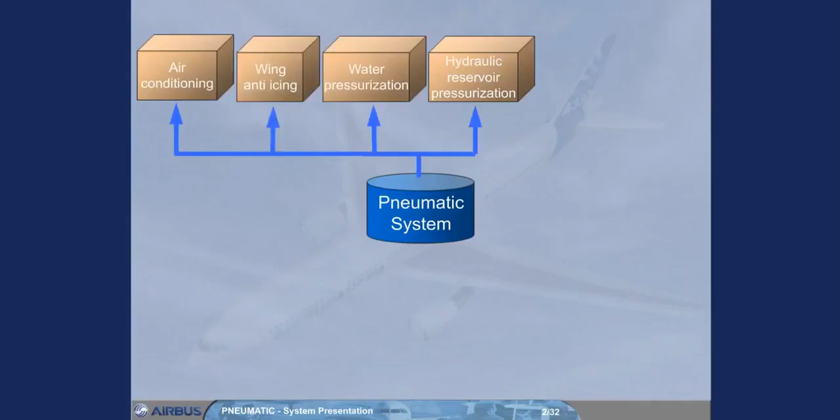The A330 pneumatic system supplies high-pressure air for air conditioning, wing anti-icing, water pressurization, hydraulic reservoir pressurization, engine starting, pack bay ventilation, and turbo fan actuation.

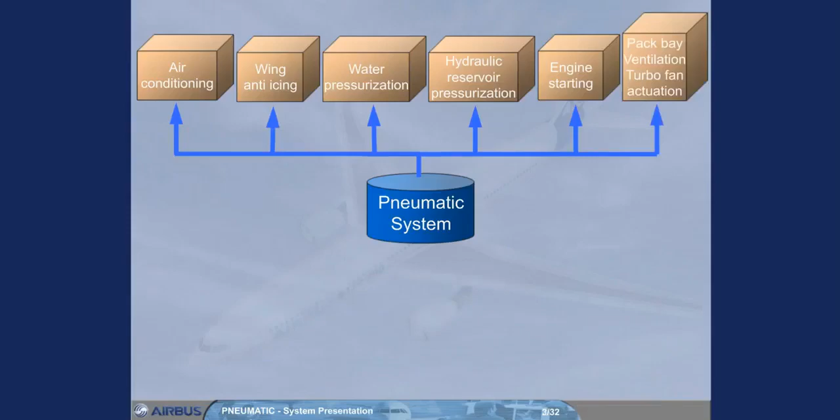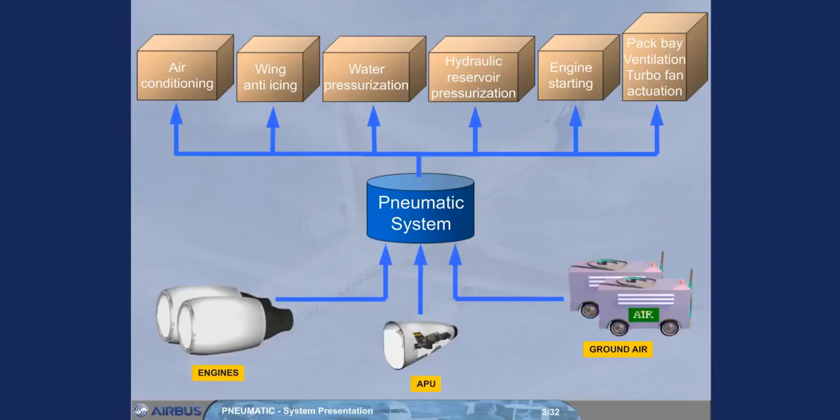High-pressure air can be supplied from three kinds of sources: the engine bleed system, the APU, and two external high-pressure ground power units. Note: wing anti-icing is not permitted when the pneumatic system is supplied by the APU bleed.

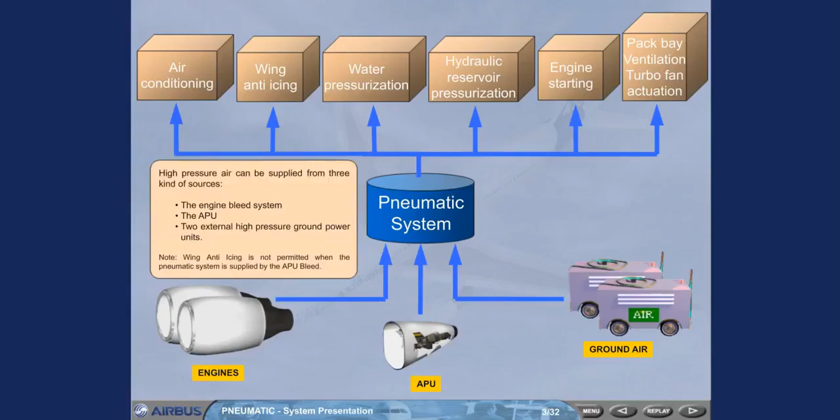The pneumatic system is controlled and monitored by two bleed monitoring computers, BMCs. There is one BMC for each engine bleed system. Both BMCs are interconnected, and if one fails, the other takes over most of its functions.

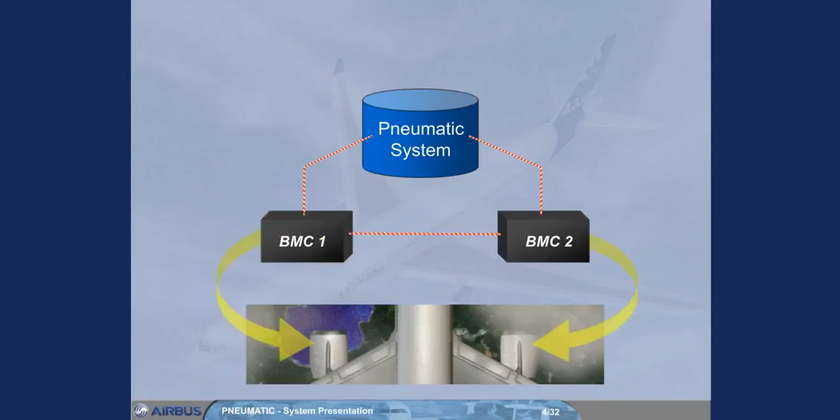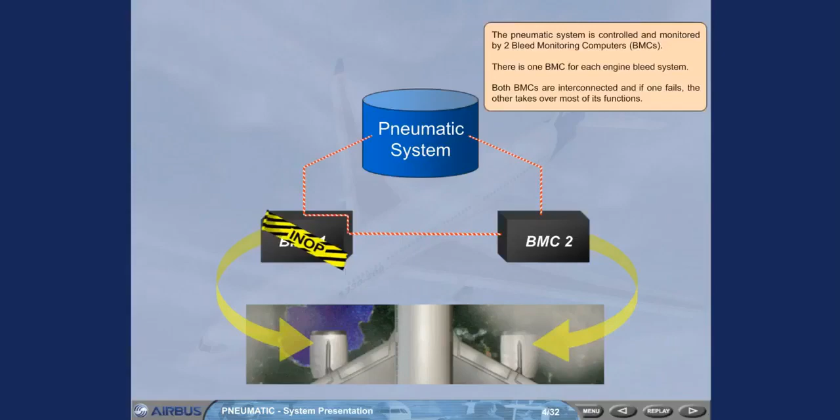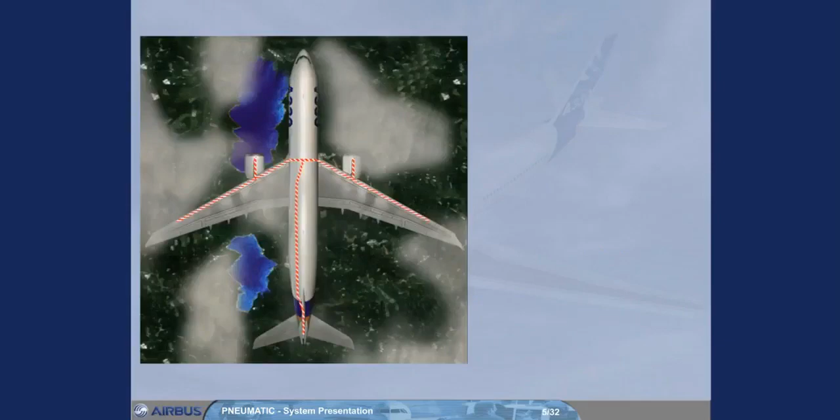An ambient overheat in the vicinity of the hot air ducts in the fuselage, wings, and pylons will be detected by air leakage detection loops. If a leak is detected, a signal is sent to the BMCs, which automatically isolate the affected area.

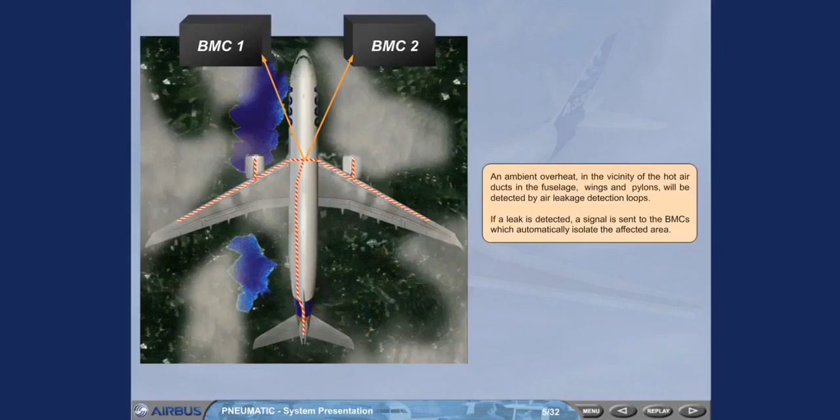In flight, the primary source for high-pressure air is the engines.

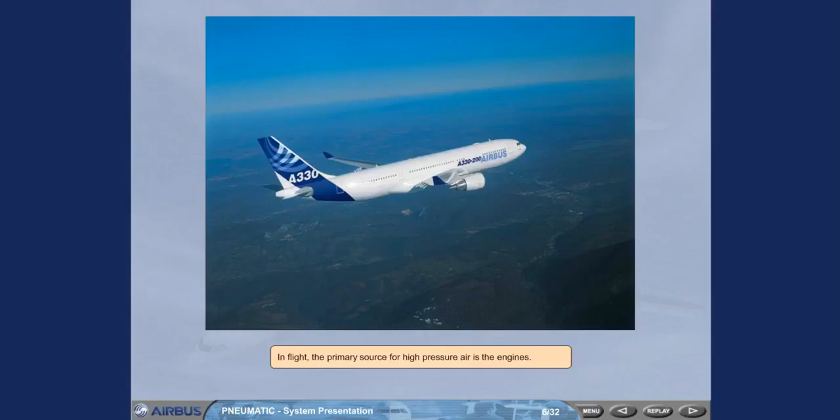Air is bled from two compressor stages of the engine: the intermediate pressure, IP port, and the high pressure, HP port.

There's an HP valve, which can cut off bleed air from the HP port. It is automatically controlled by the system and will limit the downstream pressure. Note: there is a non-return valve at the IP to protect the compressor against a reverse flow from the HP.

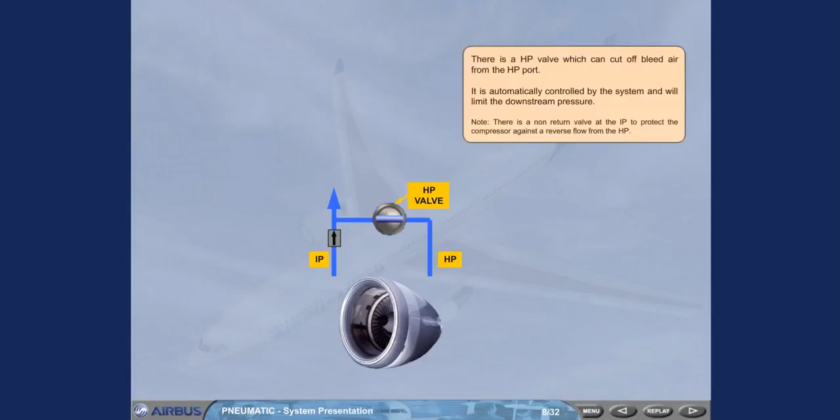The high-pressure section, HP, is only used when there is insufficient pressure from the intermediate pressure output, IP, due to the low engine compressor speed. Once the engine compressor speed is high enough, the IP is sufficient and the HP valve closes.

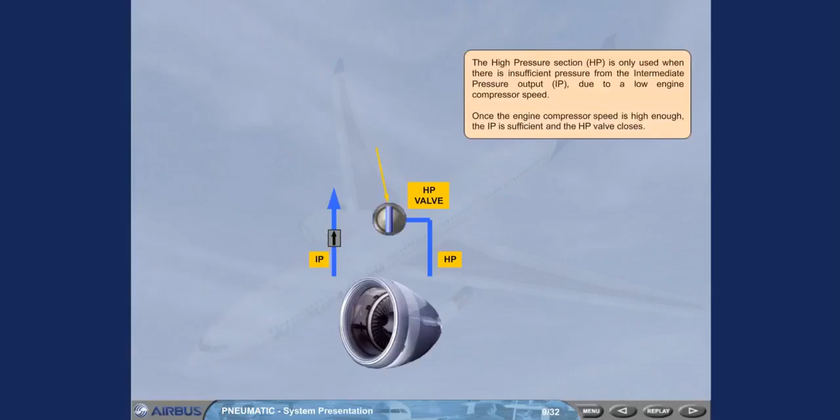The air extracted from the IP or HP stage of the compressor then goes to a bleed valve, which acts as a shutoff and pressure regulating valve.

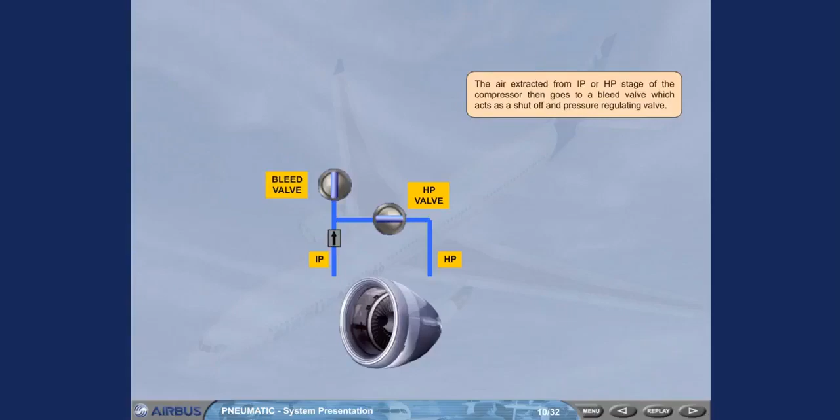Since the temperature of the bleed air is high, it passes through a precooler before being distributed to the users. The precooler heat exchanger uses cooling air, bled from the engine fan, to regulate the temperature according to the demand. Note: an overpressure valve, OPV, will automatically close in case of pressure regulation problem.

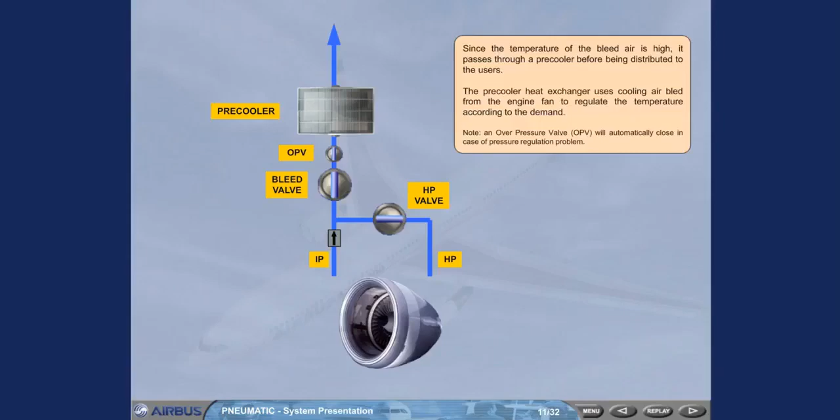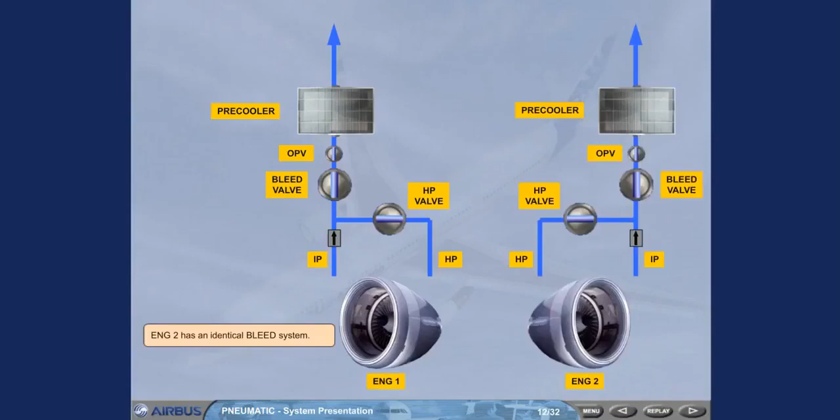Engine 2 has an identical bleed system. Both systems are connected by a crossbleed duct. A crossbleed valve permits their interconnection or isolation.

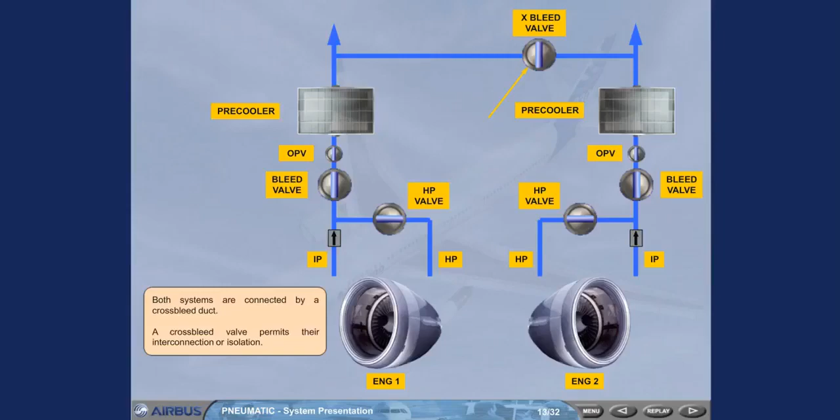The APU can also be used for bleed air supply. This is usually done on ground for air conditioning and for engine start. However, APU bleed air is also available in flight.

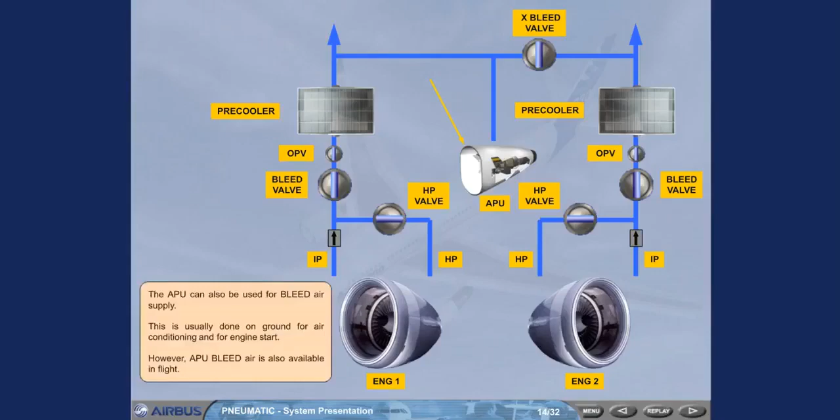APU bleed air is controlled by the APU bleed valve, which operates as a shut-off valve and will be kept open by the electronic control box, ECB, as long as the altitude is lower than 25,000 feet when climbing or 23,000 feet when descending. Note: a non-return valve protects the APU compressor against a reverse flow from another supply source.

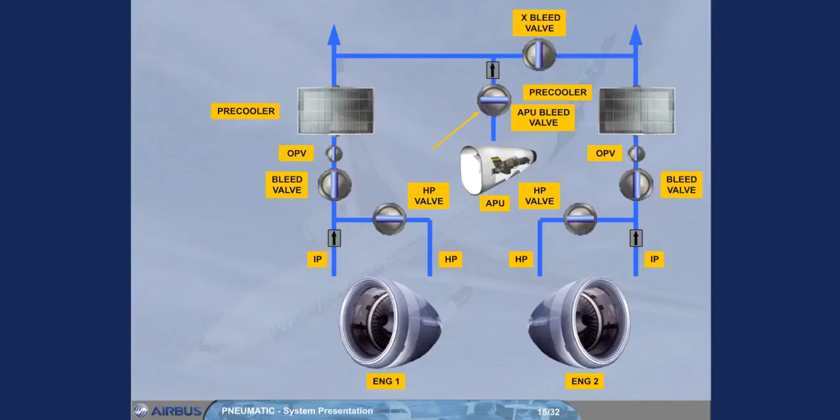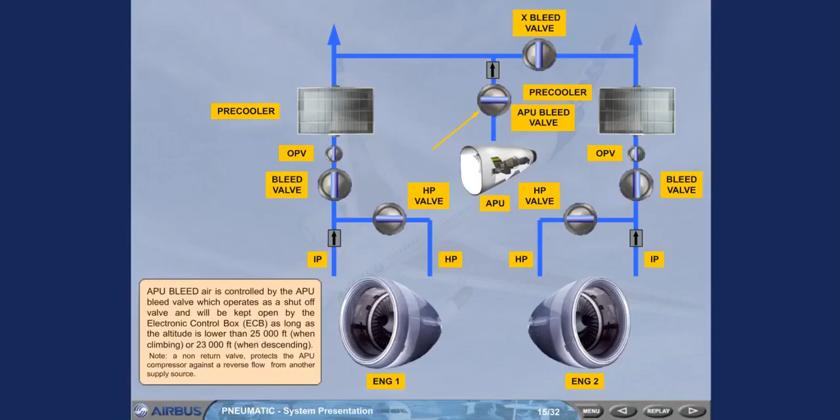Should the APU not be available, two high-pressure ground power units can be connected. This completes the pneumatic system.

We will now show you how system information is displayed to the pilots.

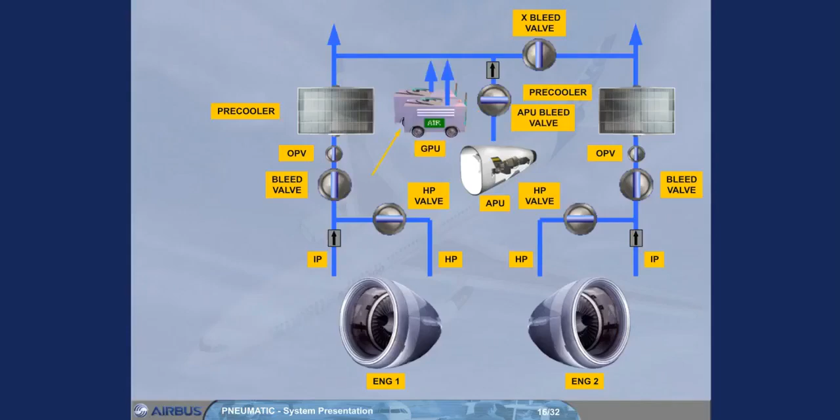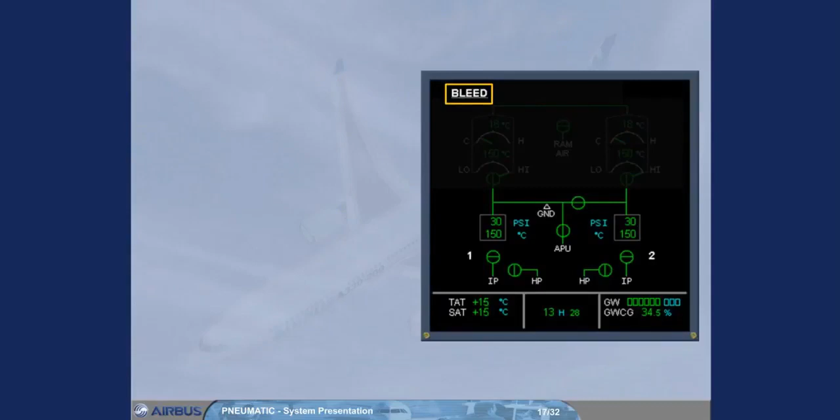Information on the pneumatic system is displayed on the lower part of the ECAM bleed page. Note: we have shaded the upper part of the ECAM bleed page because it is related to the air conditioning chapter. This will be covered in a later module.

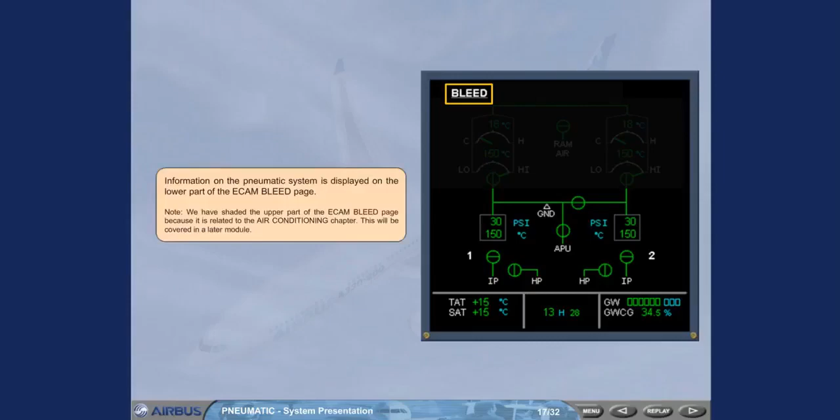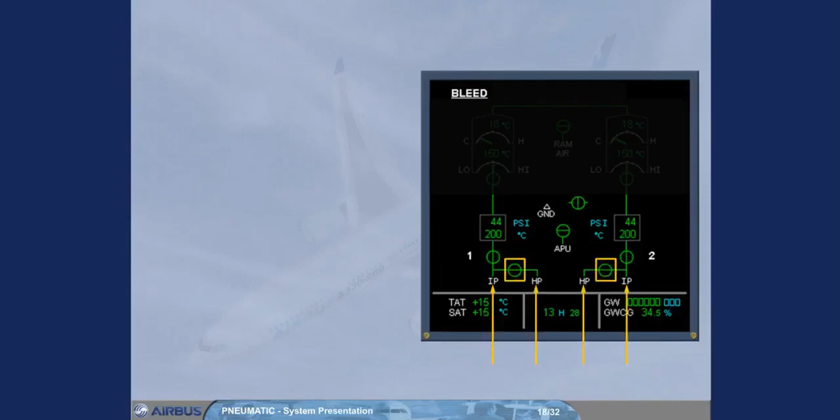Let's identify the system components on the ECAM page now: the IP and HP ports, the HP valves, the engine bleed valves, the precoolers, and the APU bleed valve, shown only when the APU is running.

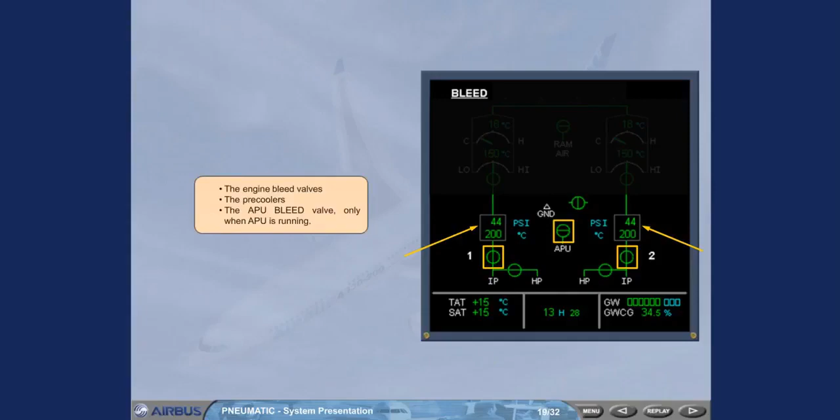The crossbleed valve, and the high-pressure ground indication, which is always displayed on ground even if the ground unit is not connected.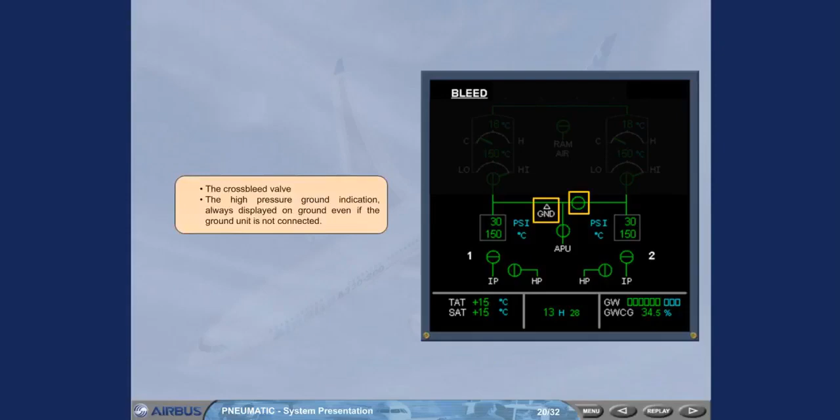The following information is also displayed: precooler inlet air pressure, precooler outlet air temperature, and engine identification numbers.

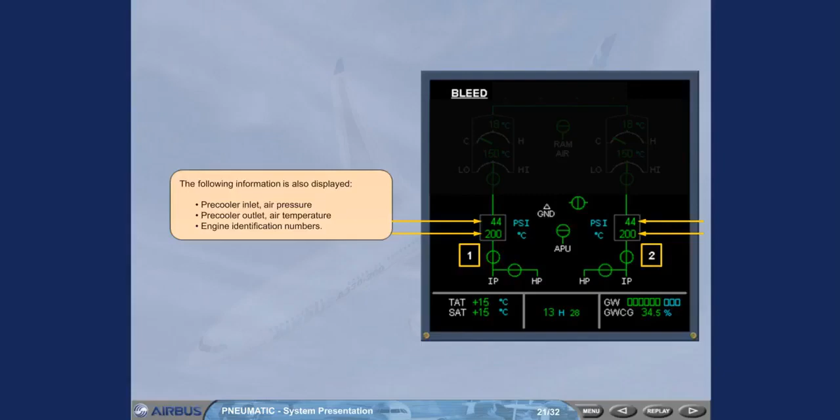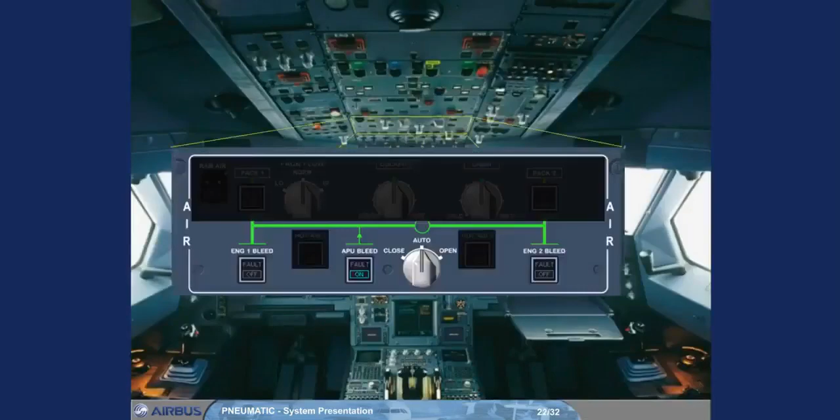Controls for the pneumatic system are part of the air panel located on the overhead panel. Again, we have shaded those controls which belong to the air conditioning chapter.

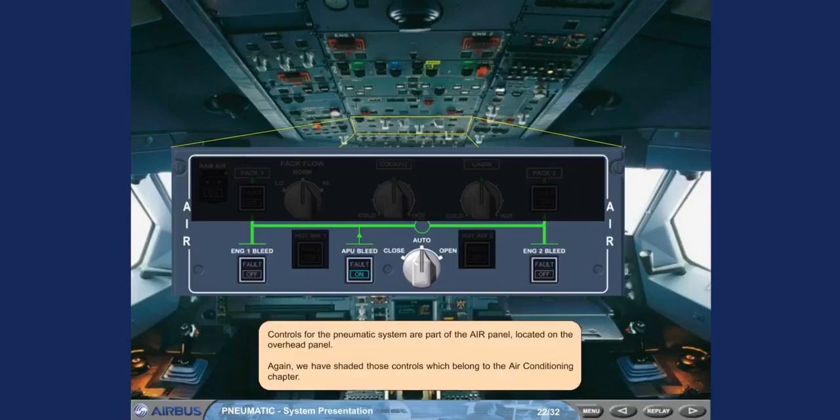Each engine bleed valve is controlled by a push-button switch on the air panel. The APU bleed valve is controlled by its associated push-button switch.

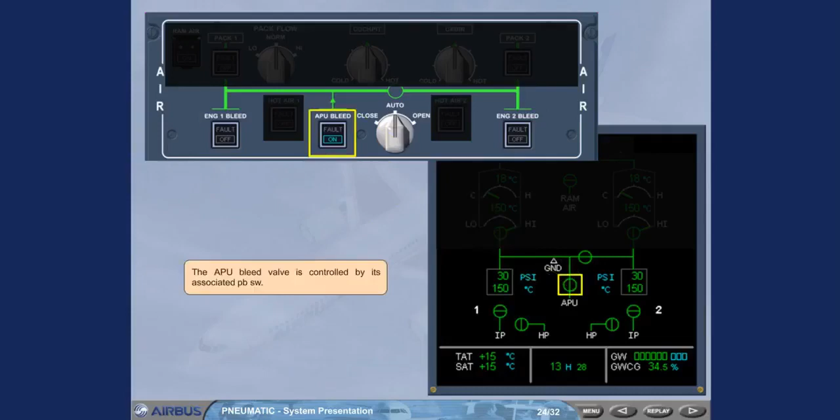The crossbleed selector enables the pilot to open and close the crossbleed valve manually, or to let the system operate the crossbleed valve automatically.

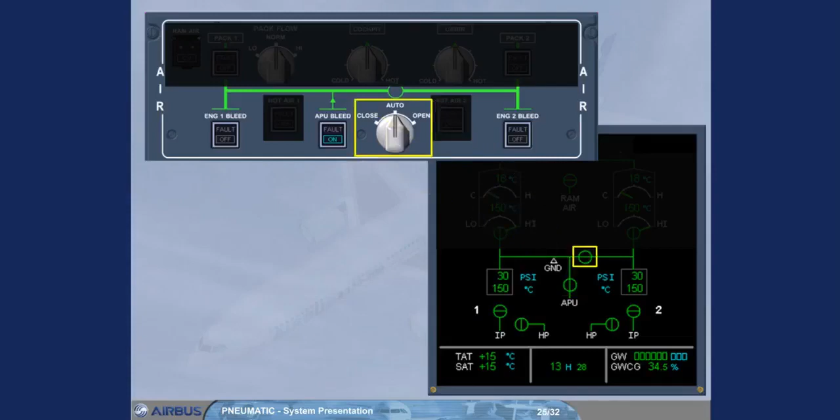Usually, the APU bleed air is used to start the engines. The APU is connected to the bleed system. You are ready for engine start.

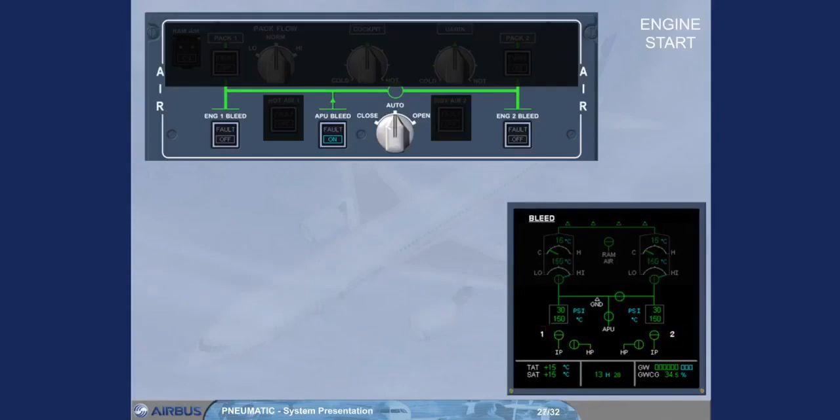Notice that the engine identification numbers have turned white, indicating that the engines are running. The engine bleed valves remain closed because the APU bleed valve is open and the APU has priority over the engine bleed.

We can now switch the APU bleed off. Observe the ECAM: the APU bleed valve is closed, and the crossbleed valve is automatically closed. It is displayed amber during transit, and the engine bleed valves and HP valves are displayed in line green because they have been automatically opened.

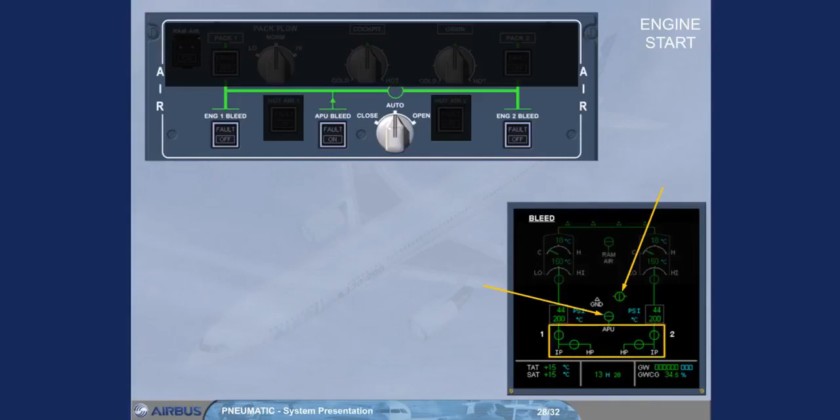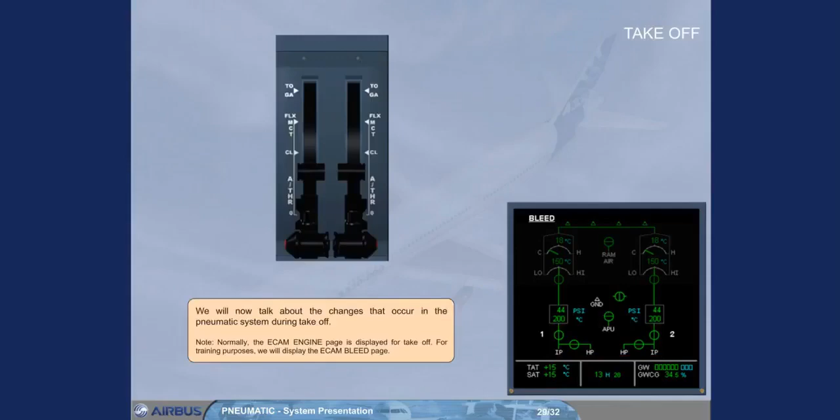We will now talk about the changes that occur in the pneumatic system during takeoff. Note: normally, the ECAM engine page is displayed for takeoff. For training purposes, we will display the ECAM bleed page.

As engine thrust is increased, the pressure delivered from the intermediate pressure stages is sufficient, and the high pressure valves are automatically closed accordingly.

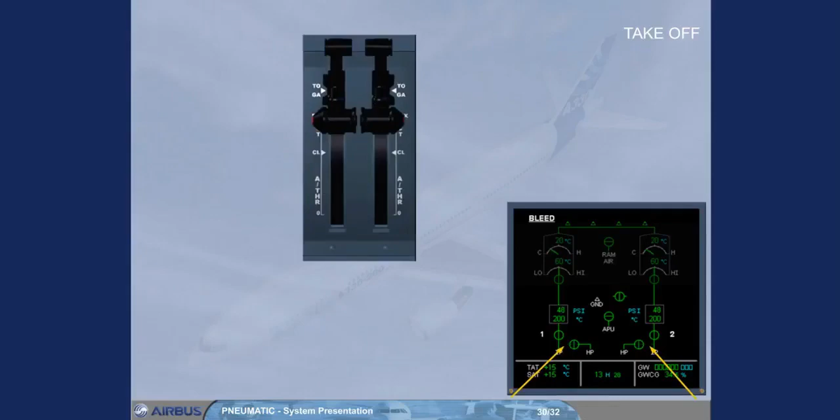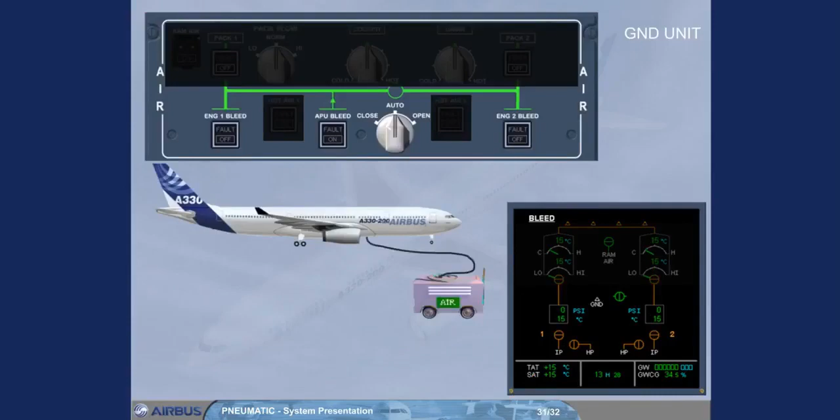If the APU is inoperative for bleed air supply, the two HP connections of the ground air unit can be connected to provide pneumatic pressure for engine start. The ground unit delivered air pressure and temperature are indicated on the ECAM.

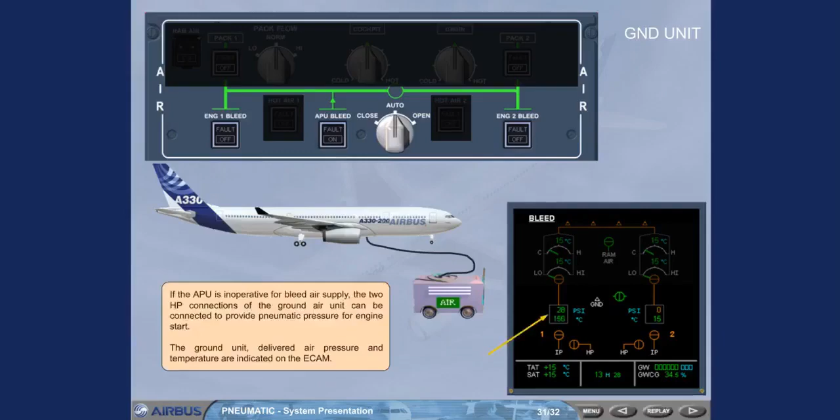Notice that in this case, the crossbleed valve remains closed with the crossbleed selector in auto position. In order to start engine 2 first, you have to set the crossbleed selector manually to open. This is done according to the procedure in your FCOM.